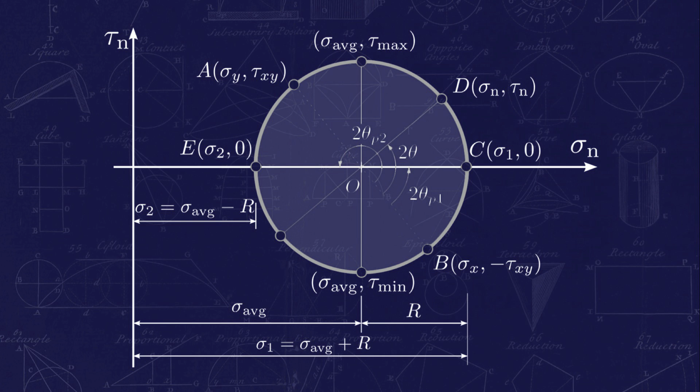And the third thing that I learned at university was there is a real artistry and beauty in solving an engineering problem to create something of real value and use out of that solution. This is a diagram I really liked at university. This is Mohr's circle, and it looks incredibly complex, but actually it's a beautifully concise piece of maths that describes in one diagram and a few formulae the stress and strain state within any solid object, so that you can work out the failure mechanism of that object, whether it's a piece of steel, concrete, soil, anything. It's an incredibly concise piece of maths and science, and really, really elegant, really, really beautiful.

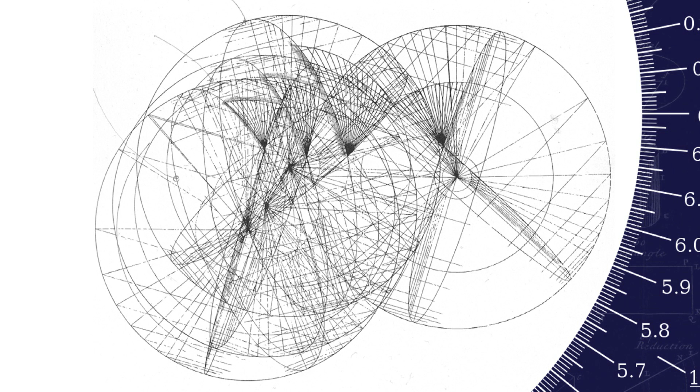A lot of the applied science of engineering also creates things of aesthetic beauty. So a well-engineered shell structure is inherently beautiful as an object in its own right. However, some of the beauty, some of the artistry, I think is unseen, isn't necessarily associated with the aesthetic. We see some of the science behind the aesthetic, maybe in terms of proportion, the way things appear, the way things are juxtaposed, which has been derived based on science, but we miss an awful lot of the science. And I'll come on to this project a little bit later in the talk, because this is a good example of it.

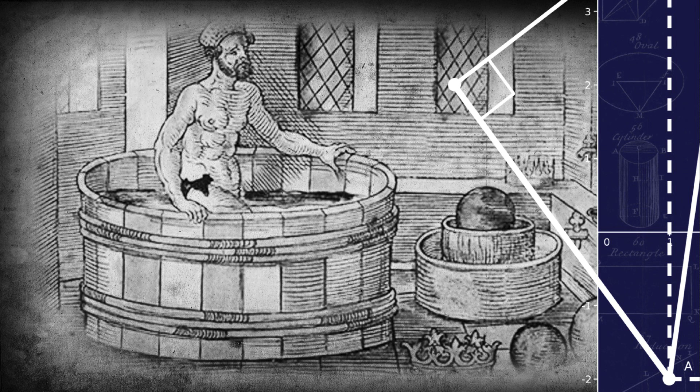Historically, there was very little precedent, so people had to figure things out. People had to use reasoning, logic, and develop ideas and work out the fundamental notions that we now use in our everyday life. Archimedes in his eureka moment in his bath, figuring out the concept of buoyancy, which we all effectively take for granted now.

Historically, there also appeared to me to be, at least within the intellectual classes, no conceived notion, or not the same conceived notion that we have today of profession. So, Da Vinci felt at liberty to be a philosopher, artist, astronomer, engineer, scientist, architect, and this is true in our profession in the building industry as well, dating right back to the first architect, which was Vitruvius, who was actually a soldier originally, and then became an architect. It's 2,000 years ago. He wrote his 10 books, De Architectura, which were effectively the first codes of practice.

He wasn't what we would recognise as an architect. He was a philosopher, master planner, engineer. One of his books of architecture, in De Architectura, was purely about water, actually, and the use of water and the engineering behind that. So he's an environmental scientist as well as everything else.

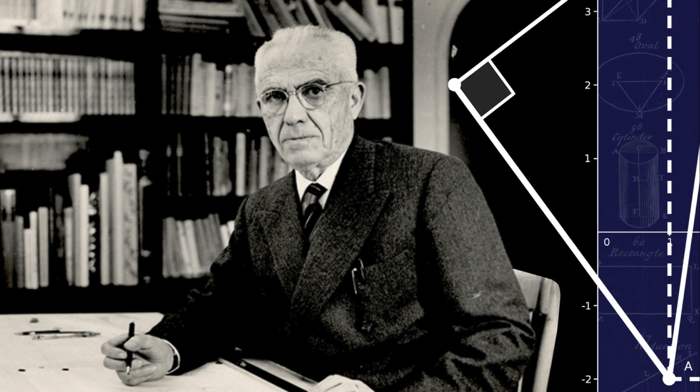And I think this notion of master builder carried on into the modern age as well, into the 20th century. This person is a guy called Pier Luigi Nervi, who is a real inspiration of mine. He's an Italian, and he was a civil engineer also originally, but he was much, much more than that. He was an architect, he was a builder, he was a quantity surveyor, he was a material physicist.

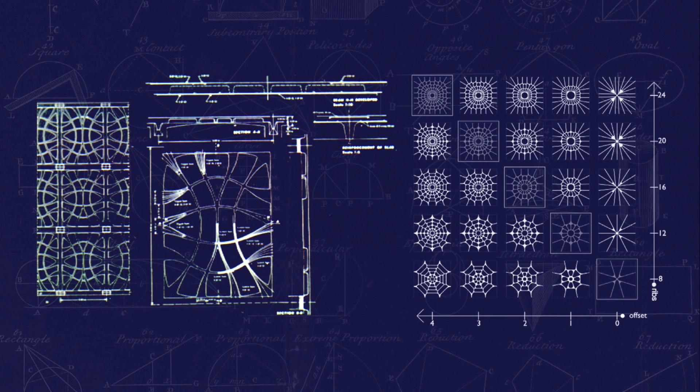In 1930s Italy, to procure a project, you had to bid, like you would do now. You do an architectural competition, so you entered a design, but you also had to guarantee that you could build that design, and you had to guarantee at that conceptual stage the price of the design. So Nervi had to give a guaranteed maximum price for his design. So Nervi spent an awful lot of time and effort really refining the designs, making them economic as well as beautiful.

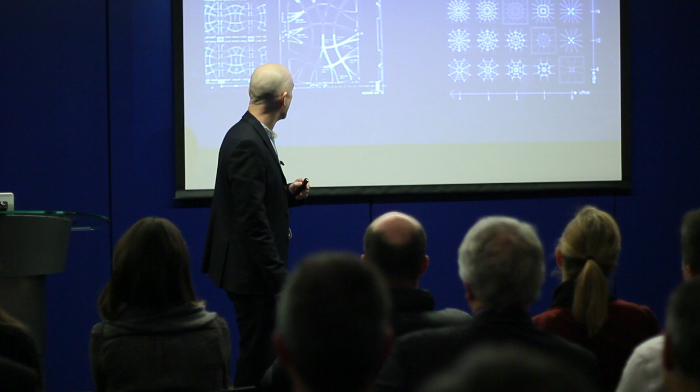And this is a diagram of a coffer slab that Nervi developed, which went into this building, the Gatti Wool Factory, outside of Rome, which uses also ferro cement. It's one of the first uses of ferro cement, which Nervi himself pioneered. So it's an incredible collection of skills and real insight.

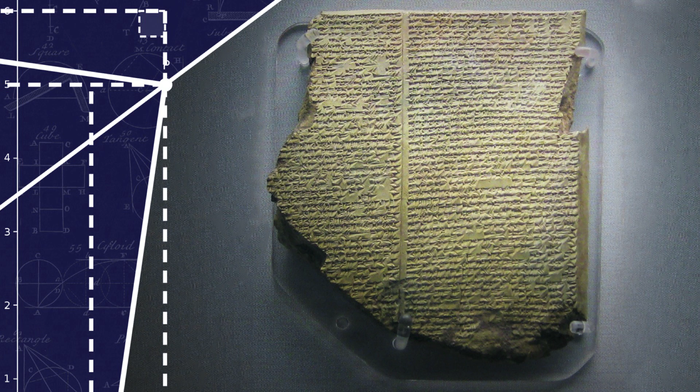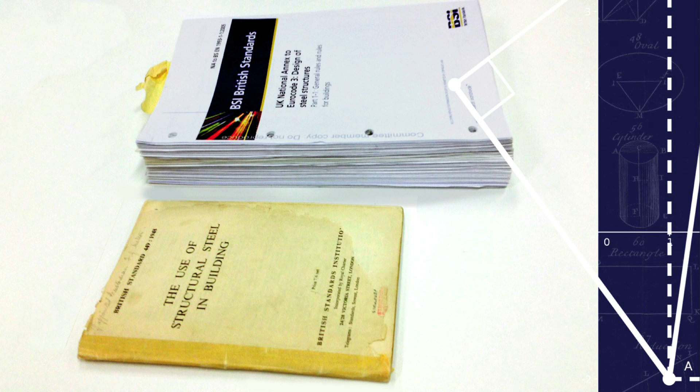We move to modern times, and this is the code of practice that we have now, which is the equivalent of this code of practice. This is the Eurocode 3, which is the modern steel code. And I understand why we have codes of practice, but gravity is still the same. A lot of the principles behind it are still the same. So one question: Newton's apple still falls on his head.

One of the things I'll pose then is whether we're being over-prescriptive in these codes of practice, and whether we're getting in the way, maybe, of creative design, creative development from first principles. Are we over-prescribing?

As a complete aside, I'm an average cook, I would say. I can follow a recipe, I can buy the ingredients, measure them out, make a decent meal. However, there's one thing I'll say I'm sublime at, and that is a risotto. I cook amazing risotto. One of the reasons is someone bought me a book once by a guy called Giorgio Locatelli, who's a famous chef. He's got a place in London, absolutely brilliant chef.

And I turned one day to the chapter on risotto, looking for a recipe, and there were no ingredients, there was nothing. It's just 7 pages of text talking about his childhood, talking about making a risotto, and talking about the 5 stages of a risotto. And I read that, and I thought, well, that's quite interesting. But actually, by the time I'd finished reading it, I can make any risotto imaginable. I don't need a recipe anymore to make a risotto. And I found actually a lot of the existing recipes missed out some of these important stages. It was a fascinating read, but it liberated me to not need a recipe to make a risotto.

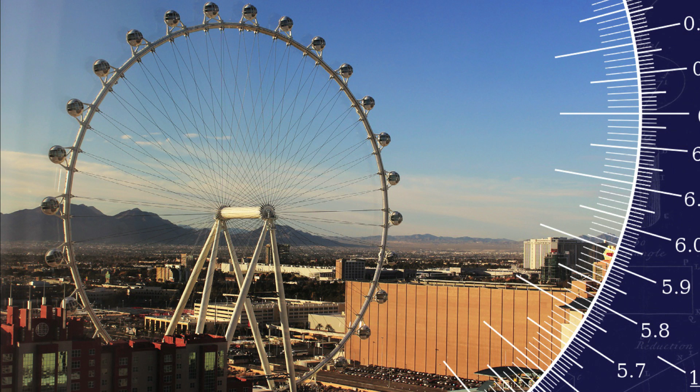I want to make it clear that I'm not talking about reinventing the wheel here. I think there's an incredibly negative connotation associated with reinventing the wheel. I think what I'm always referring to here is developing the wheel. And I think we should stop using the term "don't reinvent the wheel." I think we should turn that around and actually use the term "continue to develop the wheel."

This is, I guess, the latest development in wheel technology, which is the Vegas Flyer, which is an Arup project, which has, I guess, moved the wheel on from its wagon wheel days quite considerably. But it's an incredible piece of engineering.

So there's all this data in the world, there's all this information, there's all these precedents, there's these codes of practice. I'm not saying that's a bad thing, actually. I'm saying that's good. I think it's the way you use it that you have to think about.

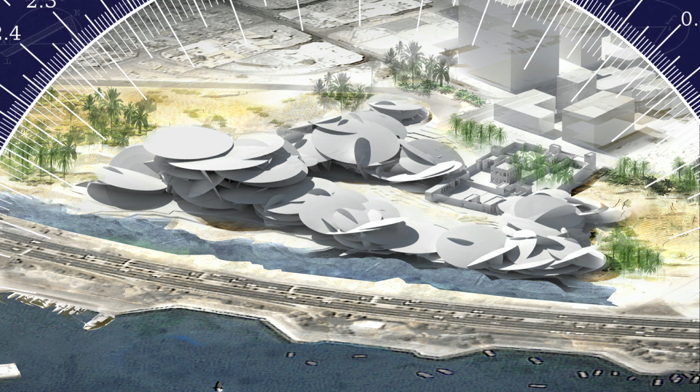This is a project we're doing with Jean Nouvel in Qatar. It's a museum building. It's 50,000 square meters. It's under construction at the moment. It's on the Corniche in Qatar, and it's based on the concept of the Desert Rose, which is a naturally forming sand sculpture. There's not a single straight line in the whole building.

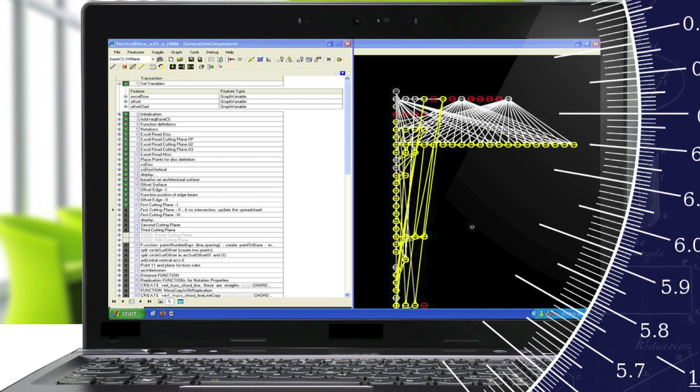The rooms are made by these intersecting plates. Every time you move a plate, the whole building, it's like a butterfly flapping its wings. The whole building changes, all the geometry changes. Our concept design for this building, it wasn't a single drawing, was actually an algorithm and a series of scripts

and a process. So we described at concept design the process of how we could engineer this building, how we could manage all of this massive wealth of data and turn this data into a final construction. So the concept here was an algorithm and a script and a process.

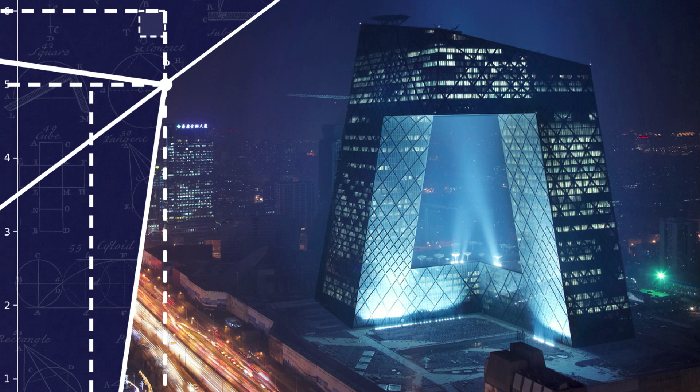Moving on to some other examples. This is CCTV, which is China Central Television headquarters building in Beijing. It's a new headquarters building we completed with Rem Koolhaas in Beijing, and a project, probably my favourite project in the last 25 years. One of the reasons it's my favourite project is in China, if you design a building

to the code of practice, you're absolved as an engineer of all responsibility. If your building falls down, you're not liable. The state takes liability. If you can prove that you did everything that was in this code of practice, you're not liable. The code is liable. However, that means the codes are very, very prescriptive, and this building breaks about every single rule in the code, and probably everything you would sensibly do in a major seismic zone.

However, that's not the end of it. If you break the rules, what the Chinese government do is they appoint 12 specialists who become the code of practice. And then you spend however long it takes persuading these people or not that you can design, build this building, and it's safe.

And for this project, it was incredible. I mean, it's another talk in its own right, but it was an incredibly protracted process of convincing these people, because these people take on liability. These people take on the liability of the code of practice. And the extremities, we did everything.

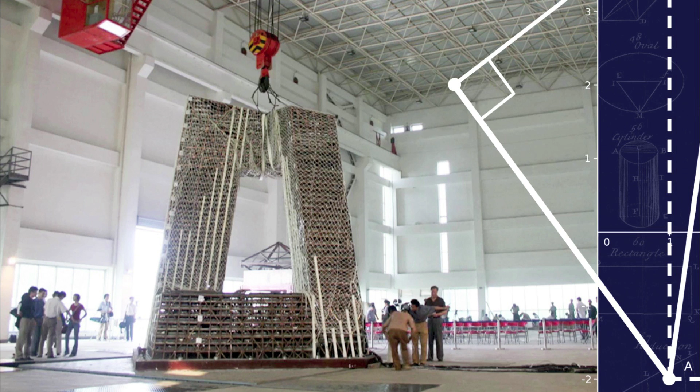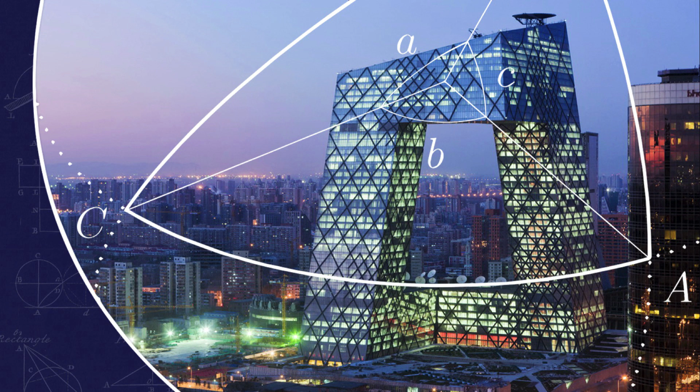We made computer simulations of the building. We made tests of pieces of the building. We even made a 1:40 model of the whole building, put it on a shake table test in China, and shook it to the maximum earthquake it was going to see, just to test that it worked, but also to convince the Chinese expert panel that this was a safe building to construct. And this was the final product.

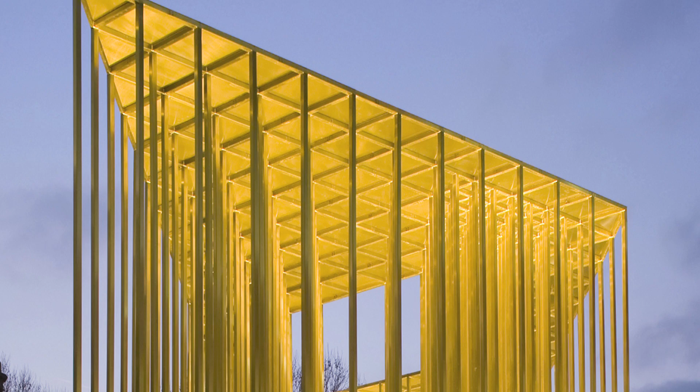On a slightly smaller scale, this is a project, piece of architecture that we did with Carmody Groarke, a brilliantly talented young practice here in London. And the essence of this design is the slenderness of these 250 stainless steel columns. This is on Euston Road, Osnaburgh Street, and I implore that you go and see it at some stage. It's very close to here. A beautiful piece of architecture.

But for it to be beautiful, these columns had to be this slender. They're 8 meters tall, and they had to be 50 millimeters by 50 millimeters. Any more, and the elegance and beauty diminished significantly. Precedents and the code of practice, and actually the client's engineer as well, told us these couldn't be this size. They had to be at least 100 millimeters, which would have killed the whole concept.

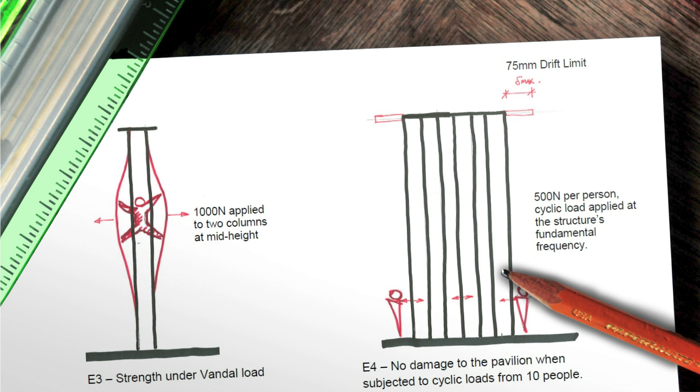So we said, well, we don't believe that. Actually, what we'll do is we'll approach this completely from first principles. Right down to, we even invented the loading criteria for this, because in the code of practice there's no loading criteria that's suitable for this. So we invented the concept of a hoodie load, which was how many hoodies it would take to either shake it to pieces, buckle it, pull it apart. And actually, this is a submission.

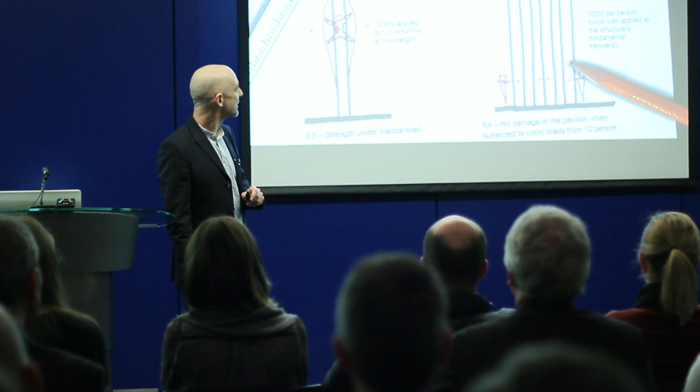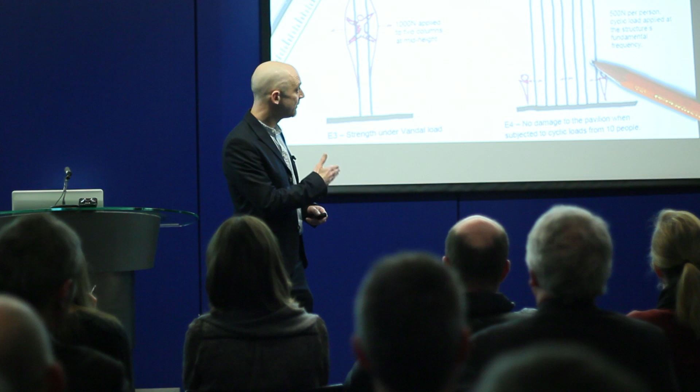This is a page from the building control calculations that we submitted, which at first they thought was a bit strange, but actually they thought it was fantastic in the end, because I think they got the fact that we'd really thought about how this building would behave and what the real performance criteria should be for this building.

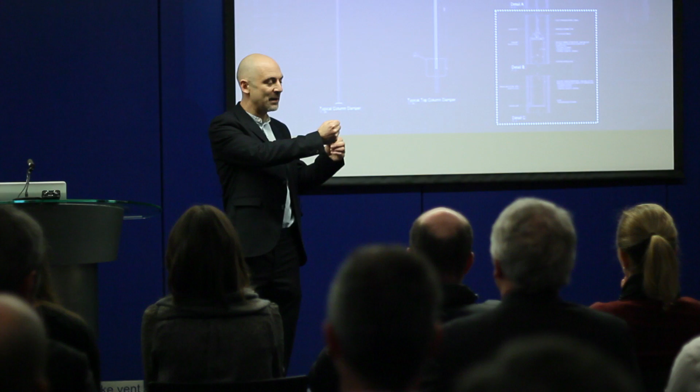One thing we found when we were doing this project is actually under our hoodie load, the code of practice actually was unconservative in one respect. It assumed that there was too much damping inherent in the structure. And actually we found by doing a full mock-up test that one of these hoodies, after however many pints, could hit the resonant frequency of the structure. Vibrating one of these columns, they could actually shake it to pieces. And the code had got that wrong.

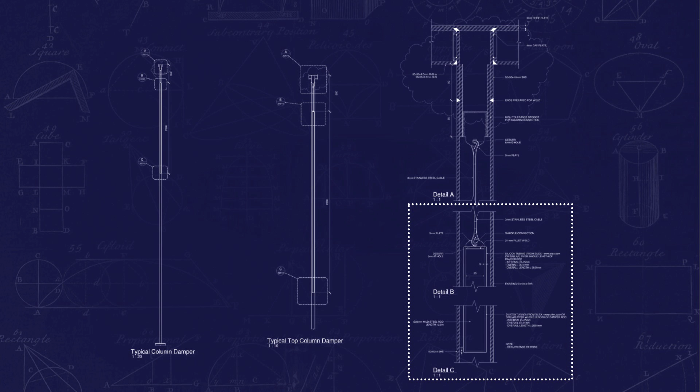So we found this phenomenon out, and to deal with it, engineered, I think, an incredibly elegant solution, which you don't see, and that's the whole point. It doesn't detract from the beauty of the architecture. But there's a stainless steel rod in each one of these 250 columns in a neoprene sleeve that just very gently bangs against the side of each column when it's being shaken. And it damps out all of the hoodie energy

that gets generated. So an incredibly elegant solution, but one nobody will ever see, nobody will ever notice. And I don't think that's a problem, but sometimes some of the beauty of an object is implicit, I guess, rather than explicit. And as I say, I implore you to go and see it. It's a beautiful piece of architectural sculpture.

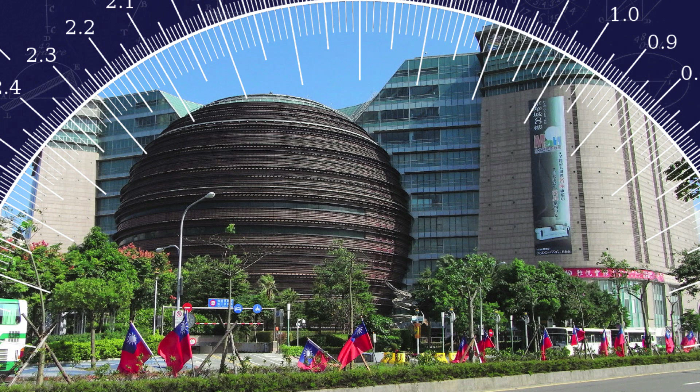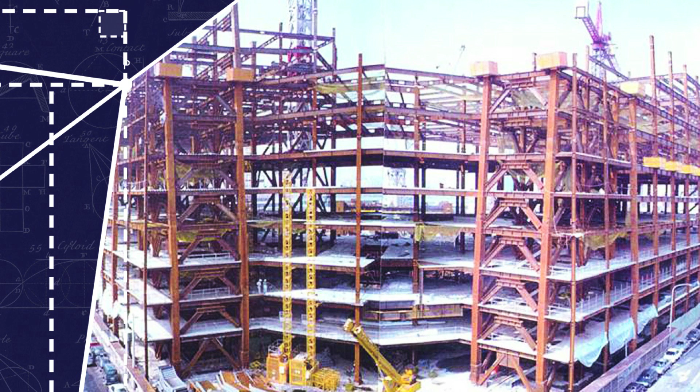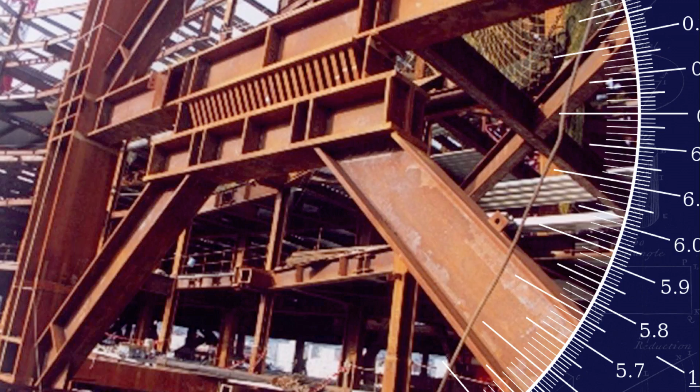Now this, on the other hand, is probably the ugliest building I've ever worked on. Yet, I think it's one of the best pieces of discreet engineering that I've been involved in. It's in Taipei, Taiwan, and it's a steel frame building in a major seismic region. The big difference is in the top of all of the braces, we've inserted this comb-like device, which is basically just a series of triangular steel plates inserted into the top of the brace.

And what that does is when the earthquake happens, if you've ever taken a paper clip and bent it backwards and forwards really fast, you find it gets hot, and that's the paper clip dissipating energy. These things work on exactly the same fundamental principle. When the earthquake hits this building, the only bit that gets damaged are these little steel plates, and they cost $1,000 each. There's a couple of hundred of them, and they saved an absolute fortune in terms of the steelwork in the rest of the building.

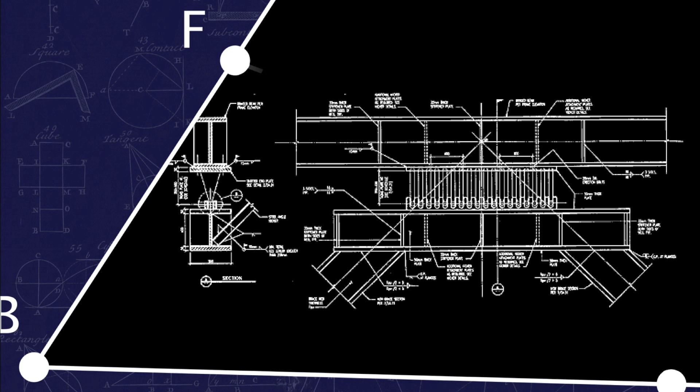And we could engineer them in such a way that the steel fabricator could build them. So the same steel fabricator who built the steel frame of the building built these devices. It's a brilliant piece of... I think challenging precedents doesn't always have to be about adding something. I think sometimes it can be about not doing something.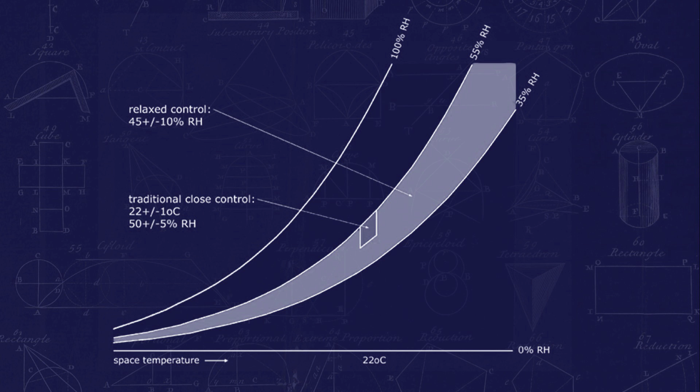So, this is the V&A Medieval and Renaissance Gallery. And the clever thing we did here was, this is a chart showing relative humidity versus temperature. Ordinarily, gallery space is conditioned to a very, very tight zone in that chart. And we worked out through a lot of exploration, a lot of talking to the curators, etc., that we didn't need to control the temperature, actually.

What we needed to control was just the humidity, and we could let the temperature range well outside of that zone and saved an absolute fortune in terms of the operational energy used to condition that space, and actually made it a more pleasant space to visit. A lot of what's in that should be in a fairly external environment anyway. I thought that was a brilliant piece of first principles thinking, and a really valuable one as well.

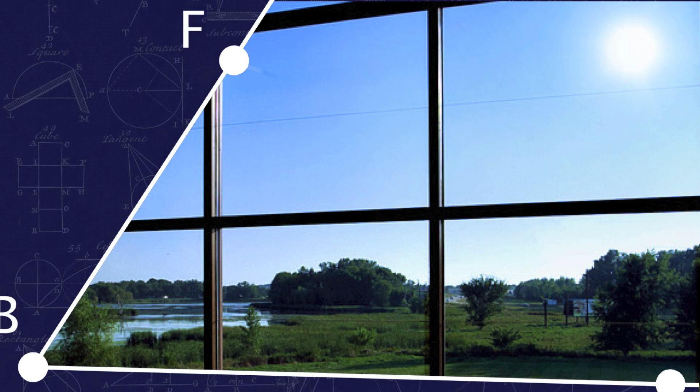I have a project that we're looking at in Berlin at the moment, and in facade engineering there's a paradox, I guess. We want to let as much daylight into our buildings as possible, but facade engineers and designers wrestle with keeping the solar energy of the sun out. So there's these two things conflicting with each other. What we're proposing for this project in Berlin is electrochromic glass, which deals with the fundamental of that problem.

So when the sun is directly shining on the glass, electric current blocks it out. As soon as the sun's gone, the electric current goes, and you've got your view back. And I thought it's a brilliantly simple idea, and will hopefully lead to some really, really good pieces of architecture, pieces of facade design.

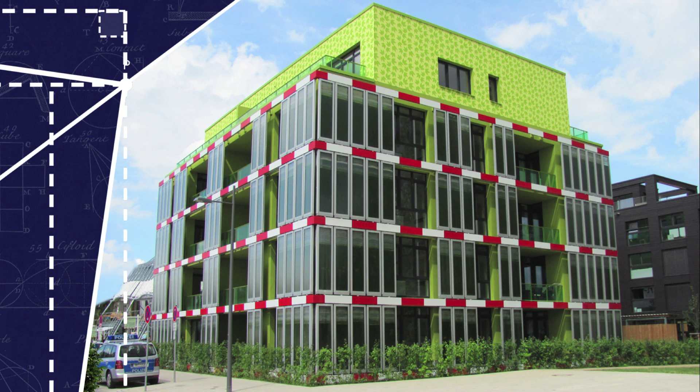Extrapolating from that point, this is a project our Berlin facade team are doing, BIQ. It's a demonstration project in Germany. And actually, here, this doesn't look great. The notion or the idea is taken even further, and actually, can you use that sun's energy, can you harvest it? Can you block out the sun, but also harvest that energy? So this is an experimental project with growing algae in a facade.

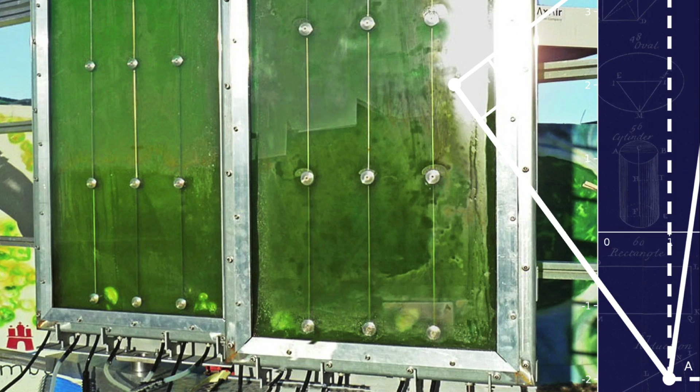So the sun shines, the algae grows, it blocks out the solar energy. Sun doesn't shine, the algae dies. You then put it in a bioreactor and harvest that energy. I don't know. I think it's great. This is about developing the wheel, pushing things on. I don't know whether this will have legs as an idea or not, but it possibly will lead to something

One of the reasons this is important, and I think this is a great statistic I picked up from, I think it was Brian Cox's show, which is the UK represents 1% of the world's population. It produces 3% of the GDP of the world, but actually it produces 15% of the peer-reviewed scientific papers that are produced, which I think is an incredible statistic, actually. It really shows, in terms of science and engineering, as a nation, we punch massively above our weight.